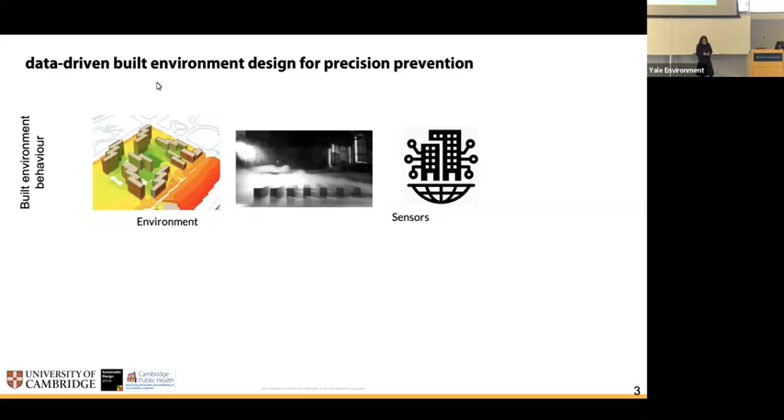I primarily work with lots of data in terms of how buildings behave, why buildings are made of certain things, and how they differ across the globe and yet contribute to a large amount of problem as well as solution. I also work with lots of qualitative data, which comes from human behavior, practices, cultural norms, and perceptions primarily on health. And then I combine all of these together to respond to the current challenges of our world, which is spatial and energy efficiency and net zero carbon, and definitely occupant health and well-being.

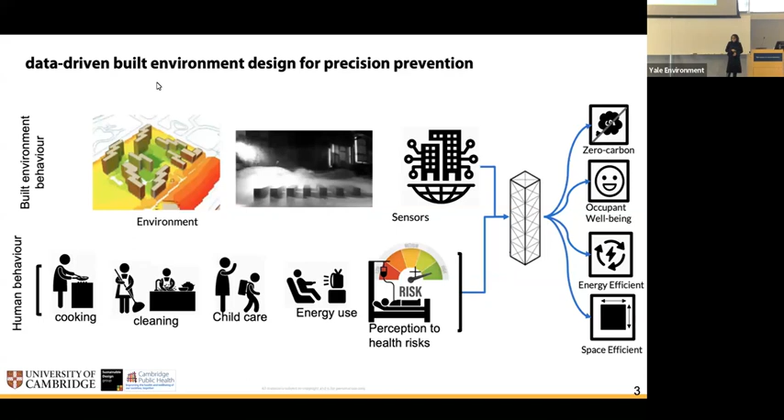But imagine I show you pathways where we can flip this whole argument that built environments are the major problem, the way they are being designed today, and flip it into a solution such that they actually respond to the larger goals of sustainable development goals, as well as health and well-being in general, so that our future population can thrive. So given this background, what are the two greatest challenges we are facing?

One is major global warming. We can understand from year to year how it is exceeding. But the second thing, which I'm going to focus a lot on, is on the global south, because that's where your future population or urbanites would be living.

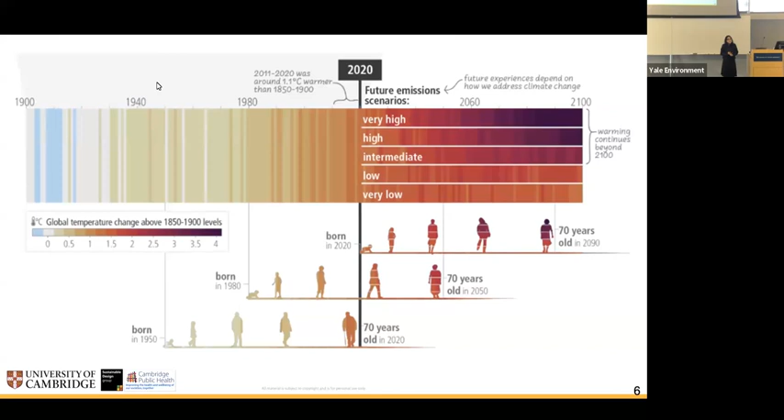Given that, I couldn't not use this image from IPCC, which kind of says, when I was growing up, I had a different world. When a kid who was born in 2020 or beyond, the world would be much different for them. For them, the health and well-being, equity versus equality would be different. It'll differ from where they are born in which part of the world. If they're in the global south, they're probably more vulnerable to major risks from climate, while also having co-risks to health.

So given this, coming back to the whole question of how can we flip this whole carbon emissions? So last year, we emitted around this amount of carbon, of which this is the total amount of carbon emitted by the total building stock. And they also contribute to around 1/5 of the total chronic diseases. This is a major problem. Can we reduce this? Can we walk towards a solution in the built environment space where all these numbers kind of get reduced in a way that it also helps economies?

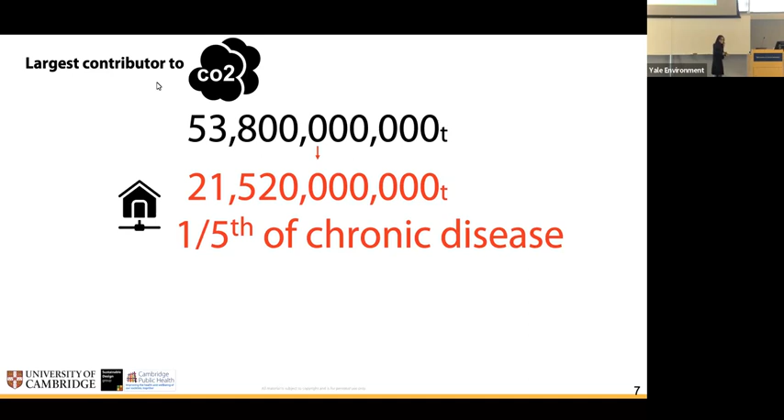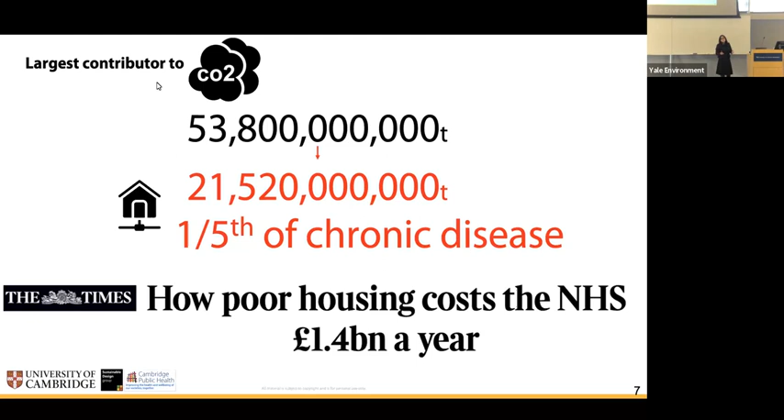Because currently, I'm using a statistic from the UK, where around 1.4 billion is spent just by the National Health Services because the quality of houses is poor. And this is one of the major challenges in the UK. So there's a lot of concern on upgrading the built environment to respond to good health. Given this whole construct, I started looking at which part of built environment can be responded to in order to reduce the burdens to health.

And then if you look at this whole interconnection that is being drawn here, how different sorts of people live both indoors and outdoors, and how outdoors are built and indoors are built as a demand for housing, if these built environments do not respond to good health, then there is a problem of air quality, heat stress, and pollution in general, but they are also connected to major health outcomes. This kind of brings us to the point that we might have to intervene in the built environment space, and built environment can be an upstream determinant of health, in order to respond to the larger goals of health.

And there's another thing that has come up in the mix because of climate change, which is the major push towards decarbonization. So there are a lot of interventions that are being undertaken in the built environment space, and there isn't much evidence on what impact these retrofits or decarbonization strategies would have on health. So looking at co-benefits or co-risks of different decarbonization strategies becomes one of the pathways to respond to built environments as a health intervention.

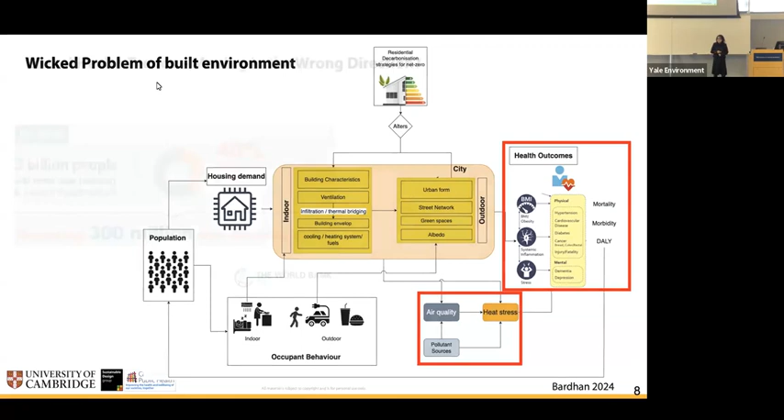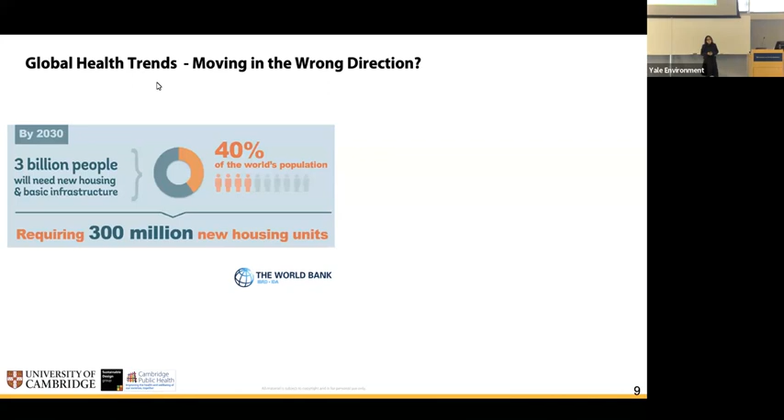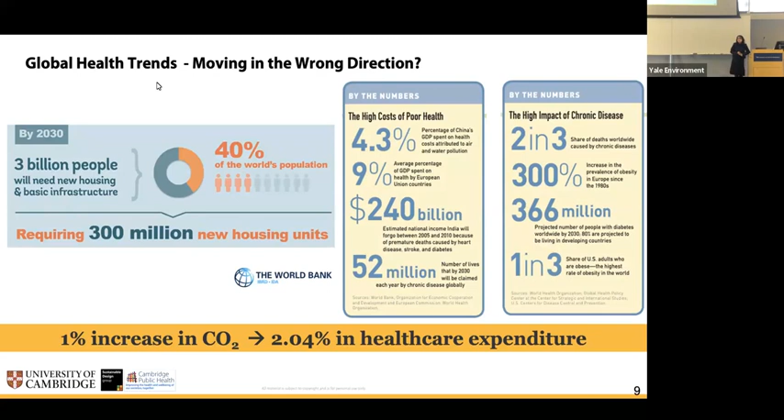So let's look at what are the global trends. By 2030, we are going to have nearly 300 million new housing units. Most of it will come up in the global south. Most of it will be in the affordable housing sector. This also means 1% increase in carbon dioxide will have a significant increase in the healthcare expenditure. That means without responding to it, countries really will need to figure out how to keep their population healthy. These are very broad statistics that show that some of the trends are really going in the negative direction, which might be flipped by having interventions in the built environment.

Given that, we started looking at major cities and how cities have warmed up in the last 3 decades. And we found out that there has been a significant amount of cooling demand that has been induced in places which traditionally would not demand cooling. Given that 1 degree rise in set point can actually cost us 20% more energy, these sort of statistics tell us more about how much of heating or cooling, how much of mitigation of carbon emissions that comes from the built environment can have impact on not just energy, but also on other aspects that built environment impacts.

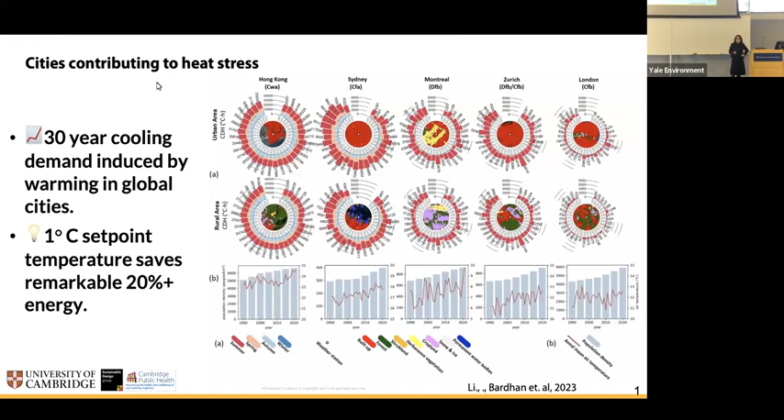So I'm going to show you two broad environments, outdoor versus indoor, both interventions, some problems, how to expand on those problems, and then how we can have some solutions around it. So in a typical global south city, you'll always find different archetypes or characteristics of built environment. And these are four or five major archetypes. Some are very high rise, high dense, low rise, low dense, or dispersed, compact.

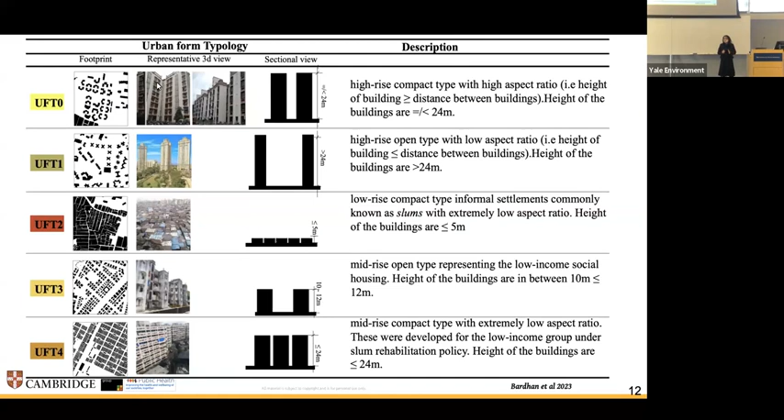So this is an example from Mumbai. What does the sectional view tell us? It kind of tells us how tall the built environment looks in the neighborhood, what would be the distance between the buildings. So we started trying to understand. There is a common consensus that cities are epicenters of heat islands, but where in the city are heat islands?

Is there a way to design built environments so that we can flip this argument, so we can use it as an advantage? So instead of looking at heat island potential, we started looking at cooling potential of built environments, in the sense of how a particular combination of built environment, the blue, the water bodies, the green spaces, and the brown, the built-up spaces, could be combined in such a way that they actually have a higher cooling potential rather than a lower cooling potential.

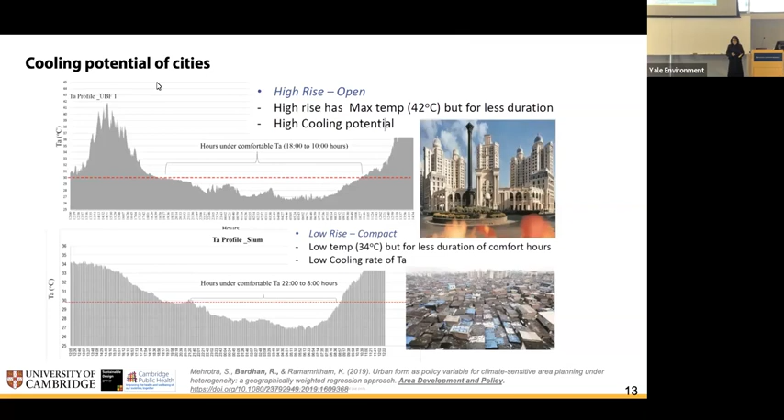So if we remember all the five different types of urban forms that we were showing, we categorized them by temperature, by their cooling potential, and into a combined heat index. And we wanted to see what was the relative risk from heat of a certain typology of environment. Is there a characteristic associated with an urban form that will make it more vulnerable to heat, given that climate warming is quite active?

So we did find out that there was one form that had very low cooling potential, but very high heat index and relative risk to heat. And that was this orange zone, this sort of built environment. Just keep this footprint in mind, because I'm going to come back to it slightly later.

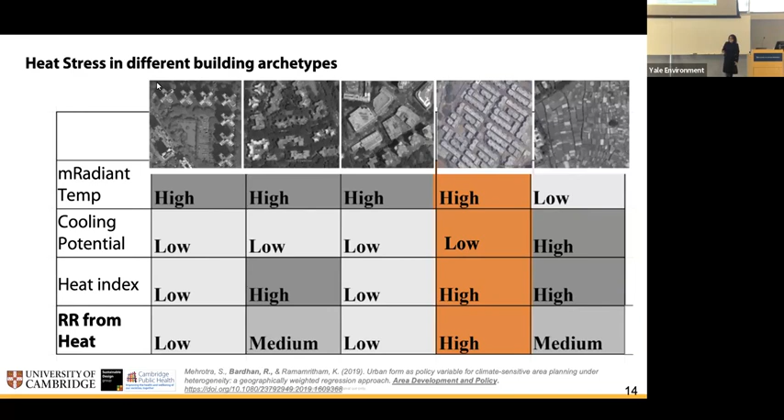Most of the time, when we talk about cooling cities, we talk about green spaces, we talk about increasing the large number of green spaces, the potential of planting trees across. So we did a systematic review. It is currently under review. So we did a systematic review to find out, are trees the ultimate panacea for cooling?

And that told us that across the world, the cooling potential of trees is not equal. So they are not always cooling places, but because of high humidity in certain regions, the evapotranspiration can work the other way around, causing more heat stress. And we did find the range is quite high, and we found out that the cooling potential of cities can range from -4 degrees to around 4 degrees of cooling.

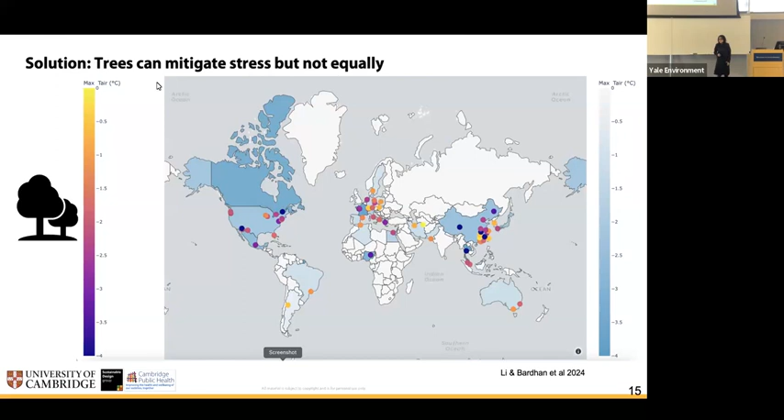And given that, how do we design and configure cities with greenery being planned so that we can enhance that potential, not just through reconfiguration of the urban forms, but also including the green spaces? So we started looking at different cooling strategies that are currently available for policymakers to adapt for their cities. And in order to do that, we did a co-creation strategy. That is, we actually spoke to a lot of stakeholders across these different cities, and we gave them these solutions.

We developed something called a matrix of ITE, which is a combination of investment, time, and effectiveness. So effectiveness of cooling was our job. We found out what is the effectiveness of cooling of different green environmental strategies, and investment and time was a part of what policymakers told us. So how much investment they are ready to make or agreeing to make, and what is the time required, that came from most of the industry partners.

And we combined them and developed a matrix to find out what is the effectiveness across different cooling strategies across different climate zones. So if you have a certain local climate zone, say LCZ1, which is mostly compact high rise, and if you combine, so M is the total number of strategies. So we had 8 strategies in the previous slide. So if you combine all of these strategies, what is the total cooling potential for different sorts of climate? Often we found out that if you combine 3 strategies together and not just stick to one strategy, that becomes much more effective in cooling down.

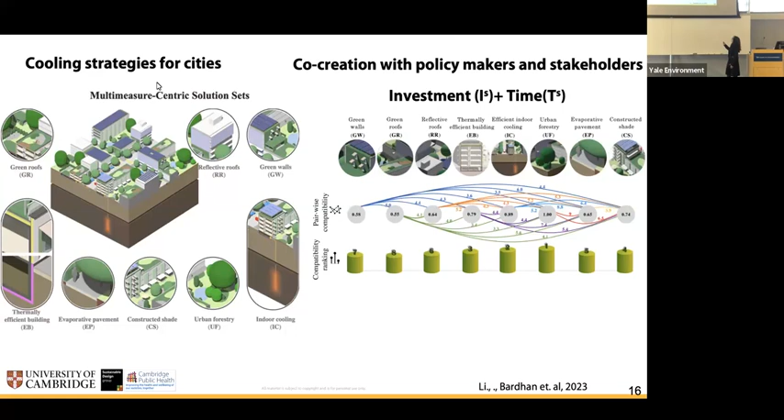But we also had to combine that with what the policymakers liked. So in the previous slide, we could find out the policymakers really like urban forestry, which is not available for lots of cities that are already built. And the second one they like is nothing to do with urban planning, but they like indoor environments to be modified in a way that they can cool the outdoor environment. So efficient indoor cooling and urban forestry was the most preferred.

So after that, we gave all these policymakers a matrix, this is an example from LCZ1, a matrix which told us what is the total effectiveness versus what is the total investment and time required. So now they can choose between a number of interventions that they would like to go to in order to cool their cities down, or they will have the potential as a matrix in their portfolio to choose from. So this is the work we did with the policymakers to respond to the outdoor environment.

I wanted to keep it short, but there is a lot of work that we are doing on the outdoor environment with policymakers to cool down not just global south cities, but also the UK, which has a very high green percentage and yet is struggling during the hot summer days to cool down. And there's a rise in purchases of air conditioning units, which has never been seen in the past in the UK.

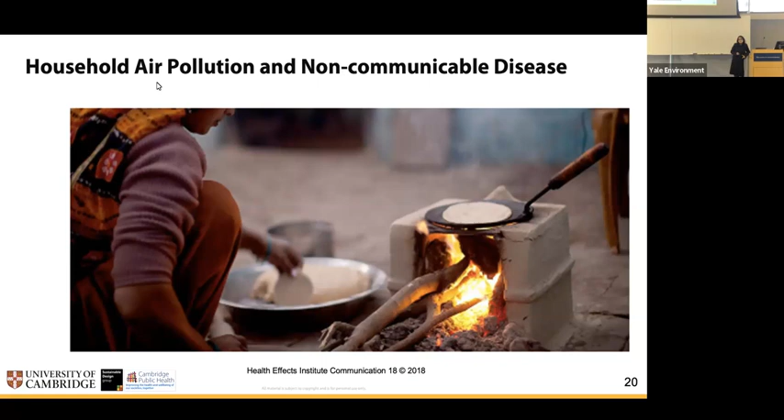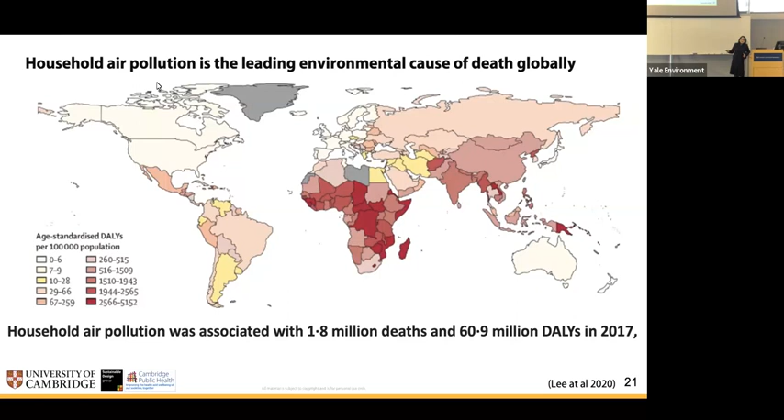So when we talk about indoor, one of the things that comes up drastically is indoor air pollution, and it's linked to non-communicable diseases. I've worked quite a lot in the global south, both in Africa and India, on indoor air pollution, and it's linked to the choice of energy fuel. And it's evident that it is one of the largest burdens of disease that the world can face, particularly concentrated in the global south, to the extent that the number of DALYs are quite large and concentrated in a certain area of the world. Given that, we started looking primarily at the global south in terms of what is the connotation or meaning of indoor air pollution.

So this is an image that you will typically find in rural India or even in rural African cities, where women would cook with a dirty fuel with an infant in their lap. A cold start of a dirty fuel cook stove releases a massive 50,000 micrograms per meter cube of particulate matter, but then it slowly goes down. And we monitored kitchens that actually are using dirty fuel.

And secondly, we also found out that on average in the global south, people are more exposed to indoor air pollution and are more at risk from indoor air pollution than outdoor air pollution. However, thresholds for relative risk for different designs are still at a nascent stage of research, which we are trying to do.

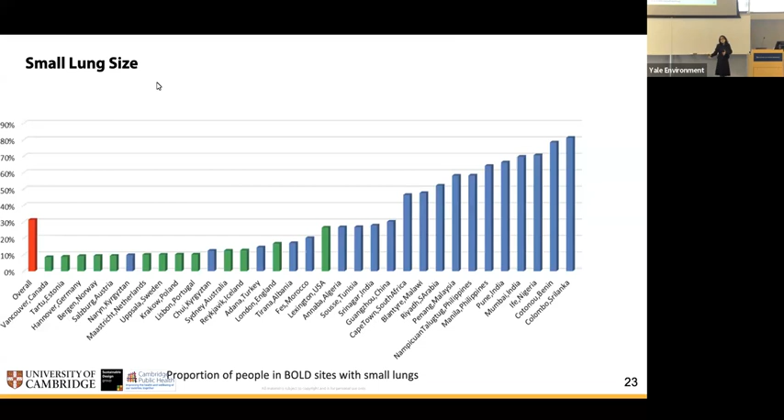How can we connect design elements with indoor air pollution relative risk? I just wanted to share this graph, which came out in 2023 from Imperial College's BOLD study, where they looked at the lung size of their cohorts in these countries, and they found that there is a significant shrinkage of lung size in populations in LMIC countries. Nearly the majority of the lung capacity is reduced. That means, moving forward, a major part of the population will not be living healthily.

Given that, I'll show you a case from Kenya where we are currently working. This is an ongoing project where the Kenyan government has done massive interventions to reduce vector-borne diseases, reducing mosquitoes' entry into the houses. They did a massive intervention in the past decades to make these houses mosquito-free.

But in this whole process, earlier, women, or the primary person who cooks, would cook outside, given the cultural notion that people generally cook outside in that community. But because of the intervention of mosquito repellent coils or meshes, these houses have modified their cooking behavior. Now they have brought cooking with dirty fuel, whatever access they have, inside their home.

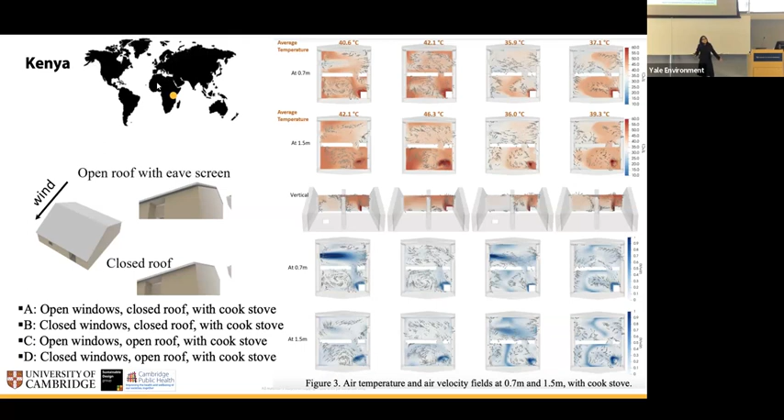So now, after 10 years, they are facing a coupled risk not just from vector-borne diseases, but also from heat stress and indoor air pollution. We modeled and monitored nearly 100 houses in one of the villages in Kisumu in Kenya. I'll just show you the magnitude here. We found the indoor temperatures can go as high as 46 degrees on a normal summer day, and it doesn't need to be a climate change or extreme heat wave day to reach these temperatures.

Apart from that, we modeled the coupled risk of vector-borne disease with heat stress disease. And we found it's not about whether you're cooking on 2 stoves or have more windows that will relieve you from the coupled risks. We had quite a large population which had just 1 cook stove but only 1 window, or 2 windows at most. Generally it's 1 window. They had a very high risk.

From vector-borne disease, you see there are two graphs showing the closed roof eaves. When the mosquito repellent meshes were installed, they often closed a large number of eaves in the houses. Some are still closed, and some were ripped off, never maintained, and people never replaced them, so now they are open eaves. But the risks remain nearly similar for both the closed and the open eaved houses.

So bringing the same context to India, we did a survey in rural India. One of the major solutions to reducing household air pollution is making people switch to improved or cleaner cook stoves or cleaner fuel. But we all know it hasn't been picked up in major economies in the global south, although now quite a large number of programs are being launched.

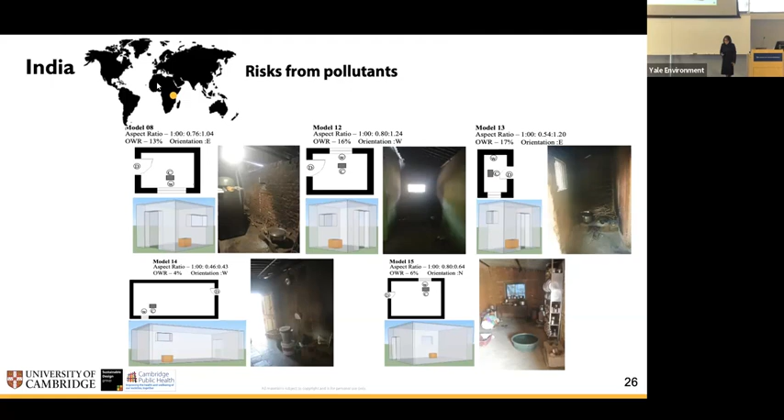What we did was we tried to see the worst kitchen versus the best kitchen. There was one kitchen which was like a long corridor, very dark, and the woman was cooking at one end. And there was one kitchen which was decently designed. We used a concept called age of air, which basically means imagine a packet of air enters, circulates through the room, and leaves the room. How long does that take for that packet of air?

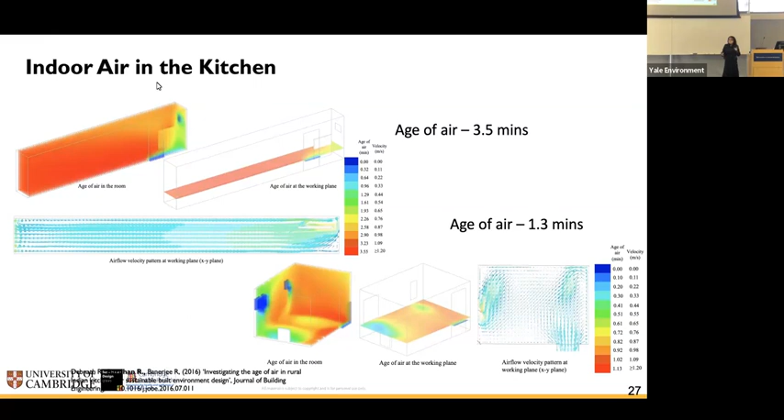With this conceptual metric we found out that the poorest kitchen actually took 3.5 minutes. Now, if you convert this into air exchange rates, it basically means one exchange will take 2.5 hours, whereas a healthy kitchen should actually have 3 or more exchanges per hour. So we said, can we make a design intervention so that these kitchens do not take so long to clean themselves? A self-cleaning kitchen. We don't call it that, we call it an efficient kitchen.

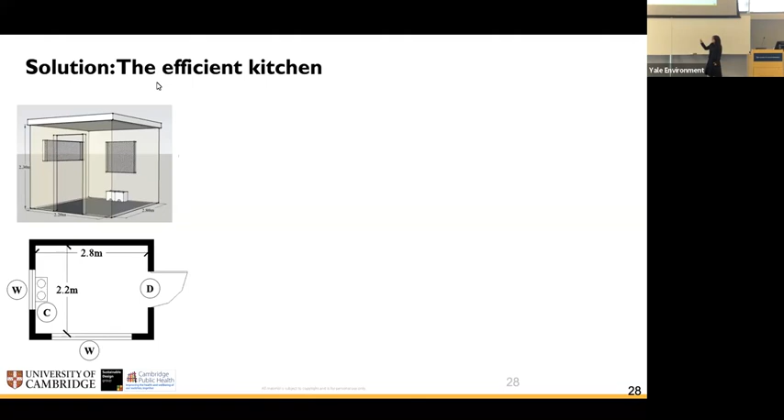So we designed a kitchen where we took into consideration not only the engineering part of removing pollutants, but also the socio-cultural parts. Even if we provided a window just above the stove, which you can see here in the image, we assumed during our modeling phase that it will be closed. However, we provided a long mesh quite high up, above eye level, so that the air can escape from there. We modeled the kitchen and found that the age of air was reduced from 3.5 minutes to around 35 seconds.

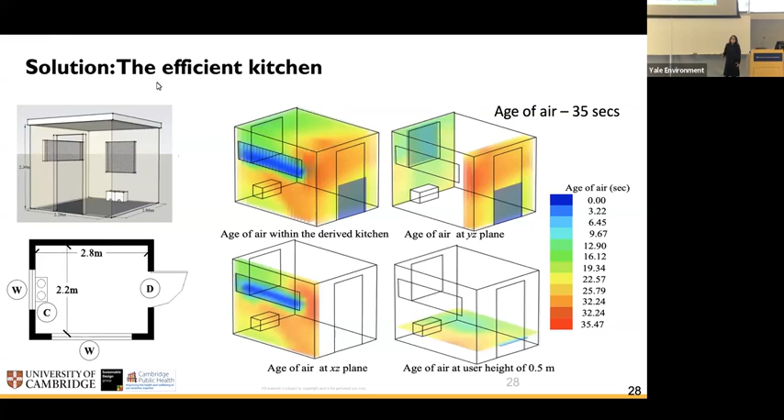We took this to the local district magistrates and showed them these results in the hope that there would be some governmental intervention. But in the process, we found out it's actually very easy to implement, because every year during the fresh harvest season, everybody remodels their kitchen. There are only 1 or 2 masons rebuilding the kitchens. If we train those masons through governmental and community support, these 157 households can have a much cleaner kitchen without shifting their cultural practices, maintaining their social norms.

This was the rural indoor environment, both from Kenya as well as India. Now let's look at the urban indoor environment and why that is important. I'm going to mostly talk about affordable housing, because that's where the investments are minimal, and yet you have a larger population living there.

We started from Bhutan, and we looked at 18 years of survey data, because Bhutan places the happiness or well-being of their population at the highest level across all their policies. So they had a living standard survey done. We wanted to see, is there evidence that if you live in a certain type of built environment, you will have a higher risk to health, or you are spending more?

Mind you, in Bhutan you don't spend any healthcare expenditure out of pocket. Any hospital visit is taken care of by the government. Any kind of medical intervention is taken care of by the government.

But there is also a larger cohort of practice or spending in healthcare in alternative medicine, which is not taken care by the government. So all these expenditures that you will see throughout in the next 2 slides is about the total expenditure, combining alternative medicine or local traditional medicines and hospital visits.

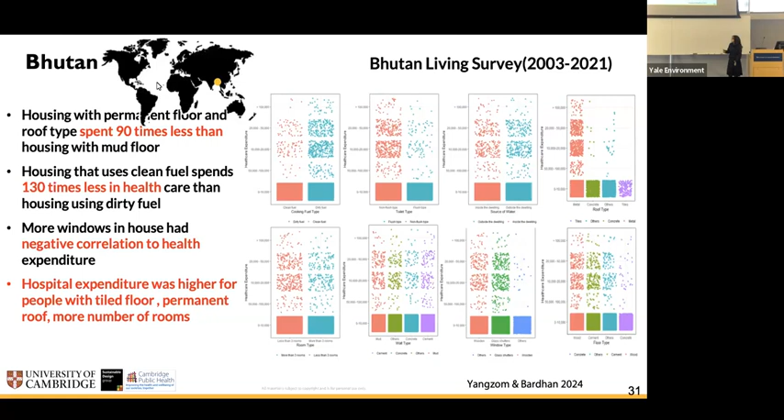And this hospital expenditure kind of tells us that higher income population living in a much better environment still fall sick, but their expenditures are higher because they take care of their health much more, or are more concerned about their health. This brings me back to India.

If you remember, I showed you one of the forms that was of very high heat stress. And which form is that? Across the global south, this phenomenon is going on where all the slums, which I don't really like to use that word, all the informal settlements are being replaced by affordable housing, something like what I show in the image. And how are these housing built? So let's look at the policy, what they are doing.

A normal national building code for any of these countries in Africa or in India would follow something called a 45-degree rule. That means the distance between the buildings will have to be in proportion to the height. And I think this is across UK, across US. We all follow this sort of a norm. It might not be 45 degree, it might be a little bit steeper, but the norm is that a 1:1 ratio should be followed. For very high-rise buildings, the norm can be compromised to a much steeper slope so that it's around 1:2 ratio.

However, when you look at the policy, and this policy document is for Indian, Ethiopian, Kenyan, and Rwandan affordable housing, this line is common across all the documents. So we don't know where this all started or who copied from whom. It doesn't say any kind of proportion. It just says the minimum distance between the buildings has to be 3 meters.

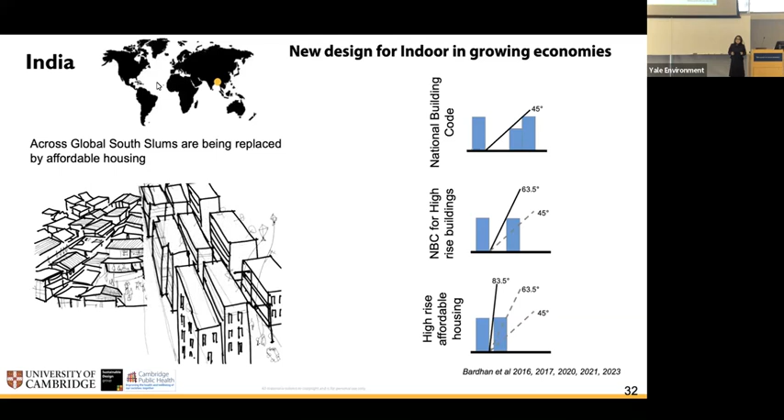Now, when you give a developer a compliance with a minimum threshold, you will only get the minimum threshold. There is no way you're going to get something more lavish. So this is actually happening across the global south. This is an image from Mumbai, not taken by me, from a movie, a very metaphorical image where we can see these slums being replaced by very high-rise buildings. And this is not a phenomenon typical only for Mumbai. It's happening across the global south.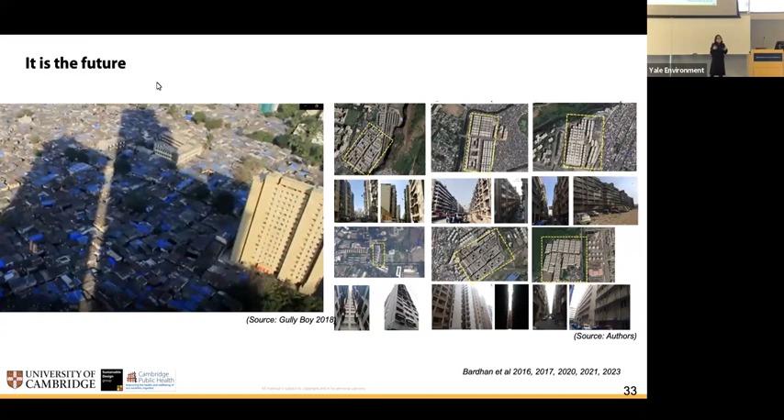In Mumbai, nearly 50 to 55% of population lives in informal or informal-like settlements. So they are actually the beneficiaries who are going to live in these high rises. You can find these high rises coming up across the city, through a policy called the slum rehabilitation policy. When we surveyed all the types of houses that have come up, they started around 1990, most of the houses came around 2000, and people started shifting around 2010, after getting through the whole process of the government.

And this is a very win-win policy for the government because the government doesn't intervene at all. So how does this whole policy work? The slum population will go to the developer and say, we want to participate in the slum rehabilitation housing policy. The developer will then take this 70% consensus from that community and go to the government and say, these people want to participate in this policy.

What does the developer get? So the developer's only obligation is to build this building. And the rest of the land that will be freed from building these houses will go to the developer free of cost, free of tax, and the developer doesn't pay a penny. Their only obligation is to build these houses for free to accommodate the whole neighborhood.

And so we found out these are the 3 different designs. Just remember the type. One is the X type, which is you have the corridor and you have units all along the arms. And then the I type, which is like a double-loaded corridor, like a hotel design or a hostel design. And a single-loaded corridor, that means the corridor runs through the periphery of the unit.

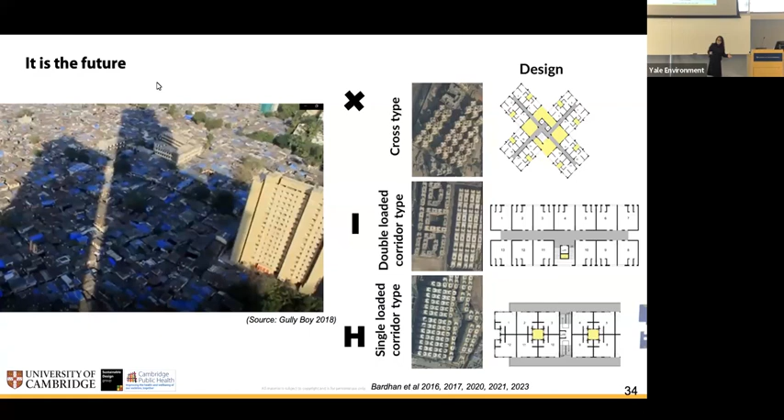So we looked at the 3 different designs that were being used. So people used to live in this sort of, this is from a slum. This is called Dharavi slum, which is the famous slum in Mumbai. It's also one of Asia's largest slums. And they will be living in this sort of public space. I'll probably talk about it later, what this difference in public space means.

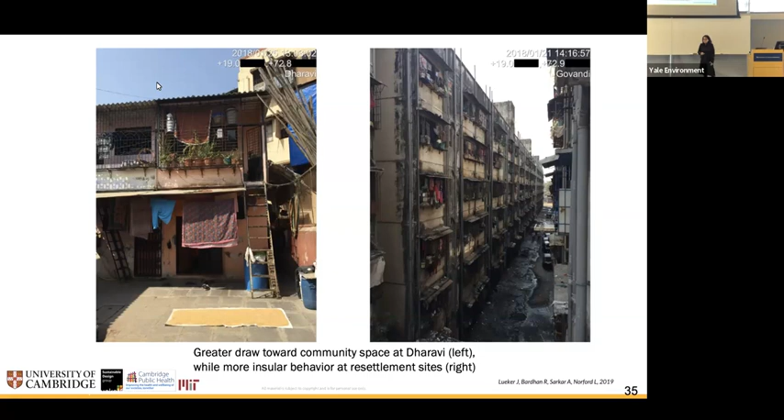But we also looked at windows, which are primary channels and outlet controls for thermal comfort and ventilation. And this is what the current rehabilitation housing windows look like. We actually rented an apartment unit and set it up as a live test bed, while we also monitored more than 50 houses in that neighborhood in order to get the live data when they are cooking in terms of pollution.

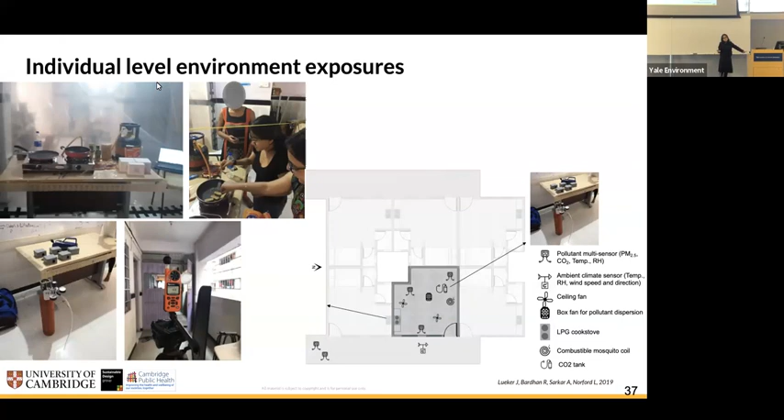But we also did a lot of parametric experimentation on these sorts of houses, like we closed all the doors and windows and then started cooking and saw when it comes down in terms of air pollution concentration. We did different sorts of design combinations to see what can actually make these houses better even after they are built.

After we did that experiment, we also conducted a survey, and our survey was very simple. We asked them, how many times did you visit the doctor in the last 3 months, compared to when you were living in the slum? In the slum, typical household size is around 5.5, which is around 6 members, and every member would go once a month or once in 3 months. Now every member is going once a month to healthcare for some sort of illness or ill-being.

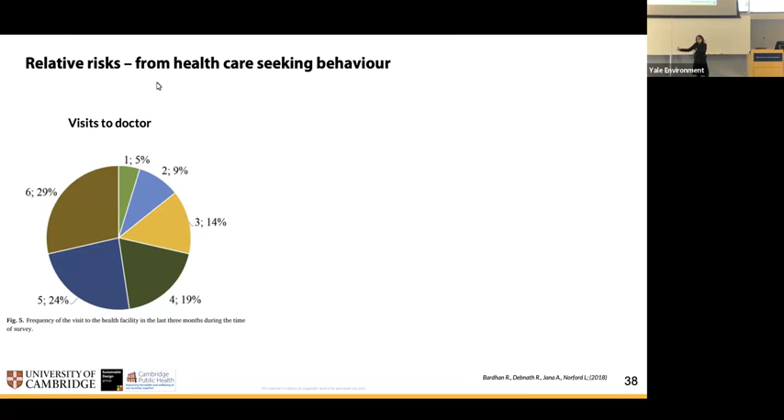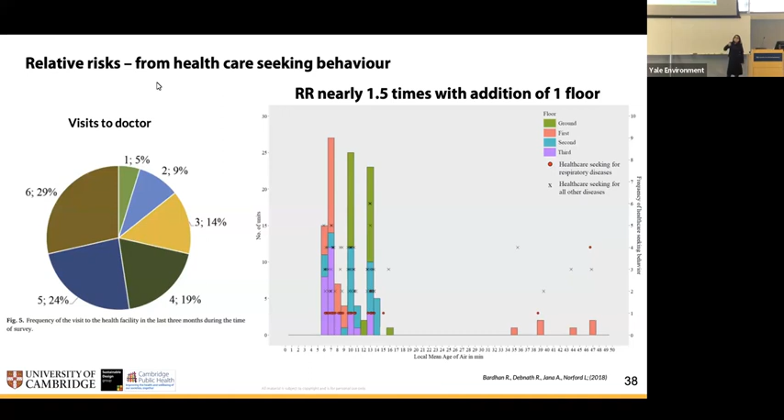We also wanted to see, is this burden of living in these sorts of houses asymmetrically distributed? So we started looking at age of air and the floor that they were living on. We found a significant proportion of the population living on the ground floor were making a larger number of visits. The frequency of visits was higher for people living on the ground floor versus people living on the higher floors. And with every addition of floor, the relative risk increased by nearly 1.5 times.

And this brought us to something that was ongoing, a project for the government. The government of India has one policy, which is housing for all, through which these houses are being built. They have another policy to eradicate tuberculosis by 2025. And they came back to me because I showed them lots of energy simulations and said, you're actually not counting the total energy burden these houses are going to face.

And they said they are facing a large population reporting tuberculosis after they have shifted into these houses. And this is concerning because when you have a vision to eradicate tuberculosis by 2025, and you want to build all of these houses within a certain threshold, if there is a correlation... so they asked us to do that.

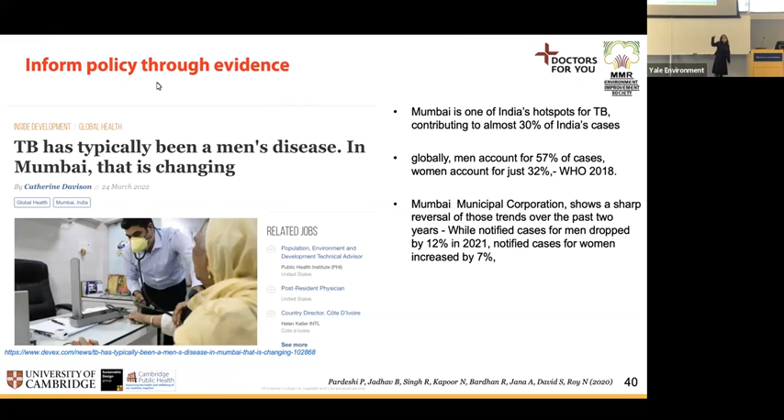We also said that they will face a large population of women and children having tuberculosis in 2020. And this is not the global average. Globally, tuberculosis is mainly a male disease; a larger proportion of the male population gets this disease. In Mumbai in 2021, it was reported that there was an increase of 7% in females reporting tuberculosis, primarily living in these sorts of areas.

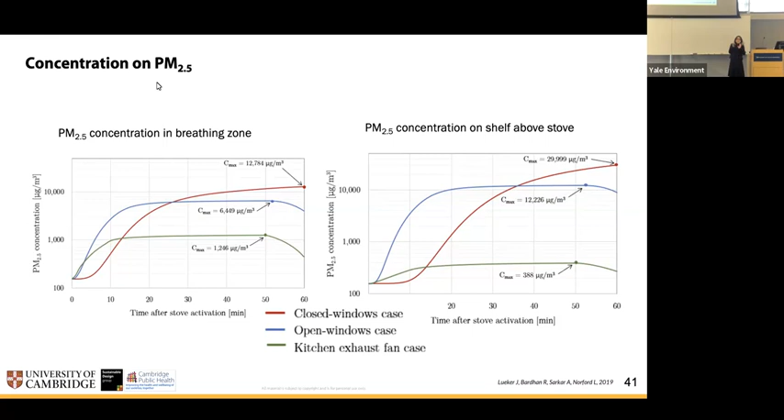So coming back to the pollution level, we also found out that most of the time in the H type, because the corridor is actually a public thoroughfare and access corridor, people keep their windows closed while cooking. So if you look at these graphics, this means the window is open, and this is window closed. If there's a ceiling fan on when they are cooking, and a blanket hung, it means that deposition of particulate matter is happening at a higher level because they have lots of furniture inside.

And we found out on average people follow this, which is windows closed and the fan on. Somehow there is this belief that if you switch on the fan, the smoke and particulate matter will go away and the concentration will be lower, which is not really the case. So to look at built environment interventions, which combine passive and active interventions and behavioral mechanisms, we said just by behavioral mechanisms like opening the windows, you can reduce it to a significant level, but it will still be higher than the ambient.

But by using a HEPA filter on the windows, or planter beds and HEPA filters together, you can reduce it by 94% with active as well as passive measures. But if you don't do anything else and just install an extract fan, it can actually reduce it to a significant level. However, extract fans were not being given by the government or the developer at that point in time to the dwellers, so they were not installing them.

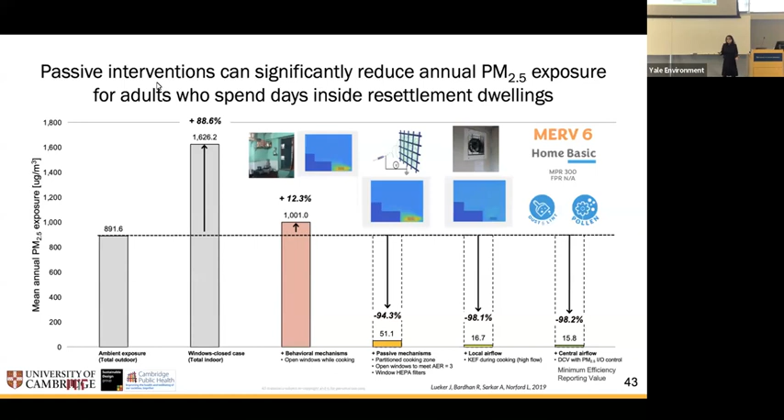Coming to my last portion of the slide, so we started looking at heat stress, and we found out an interesting data. This is where the gender came in. While male population were at heat stress at a much lower temperature threshold, the female population said they are more comfortable at a much higher threshold. This means that the female population would reach for adaptation much later, when physiologically their body has gone under stress.

And this is a major thing, which this data doesn't exist in a larger number. We couldn't find any data set which actually could give us this sort of an indicator to understand the relative risks between male and female, but we did experiments in mice, one of my colleagues from Cambridge, to see if male mice versus female mice has higher potential from heat stress risk.

And they did find out in mice, there is a higher immunological risk from heat stress, because female mice were tolerating higher risk of heat and were going into an immunologically compromised condition, whereas the male population had a much lower threshold of heat risk. And we are still working on it. I don't have lots of data on it.

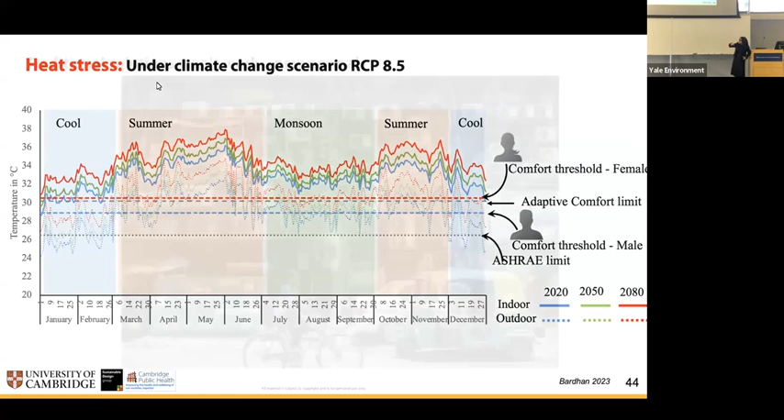And this is primarily because with modernization... traditionally clothes were made of cotton, which allowed for ventilation, which allowed for cooling themselves down. So traditional clothes are not the problem. It is the material, because all of this material is synthetic, that is causing this high level of insulation. And now imagine this is coupled with the higher heat stress threshold that women are bearing. So this, coupled with having less agency to actually access cooling information, can put the whole population into a high level of heat stress.

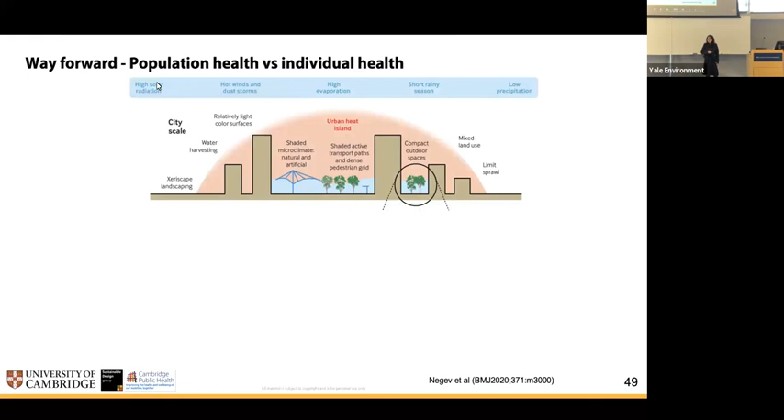This brings me to the end of my talk, where I talk about that we can do a lot about population health, but if you look at individual built environment interventions, we can also apportion the burden to individual risks of health. And this can be done by doing a value-based reimbursement approach versus a cost of illness approach. Ending my talk here into the conclusion.

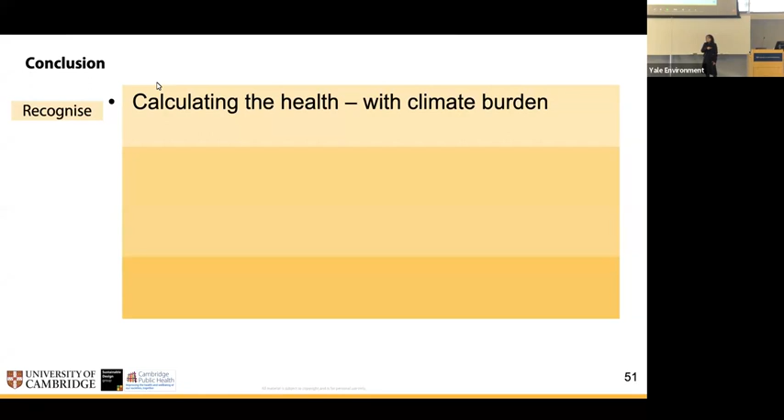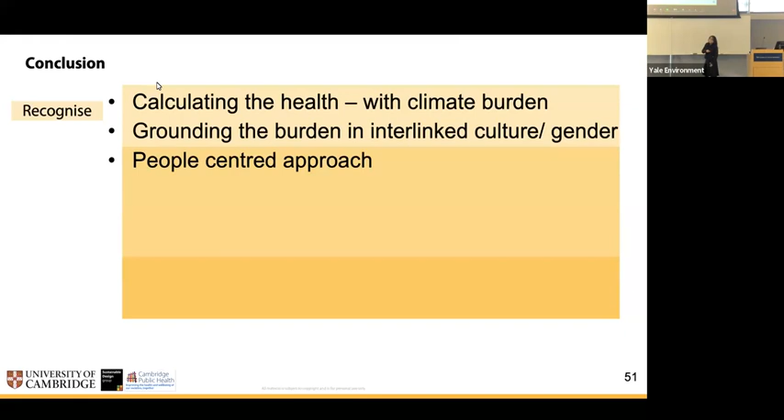So in order to summarize all of this, how do we respond? We can respond by recognizing the problem, calculating the health and the climate burden, grounding them into the interlinked SDGs and in culture. Then a people-centered approach becomes much more important. So you recognize through the people-centered approach. You reflect, making risk information more tangible.

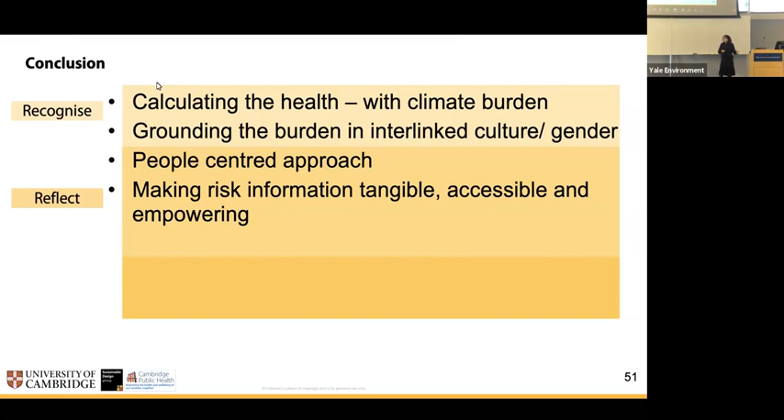So when we made available to the women the data on at what temperature they are actually reporting thermal neutrality, they were themselves surprised that they have such high tolerance to heat. So it makes people more powerful, informing policy through evidence, and then finally transferring the agency and generating new data. So I do lay a lot of emphasis: there isn't gender data available to map heat stress risks from indoor and outdoor environments. A lot can be done, and built environment, if done right, can be both a climate and a health action.

And if nothing else works, we all should pray.